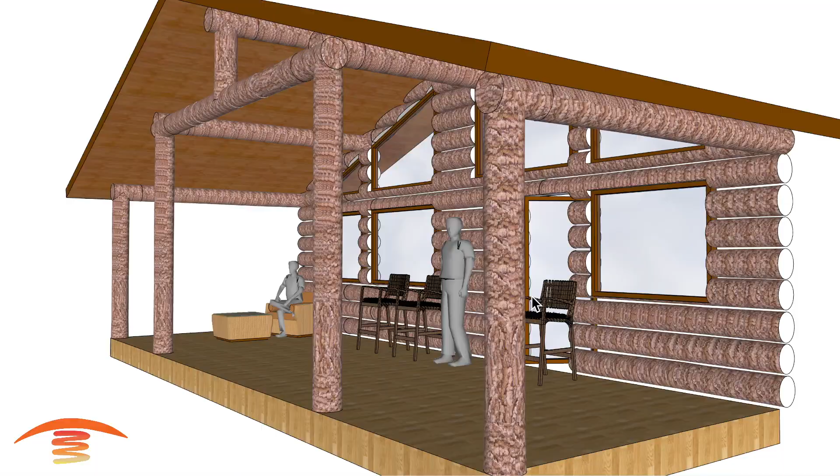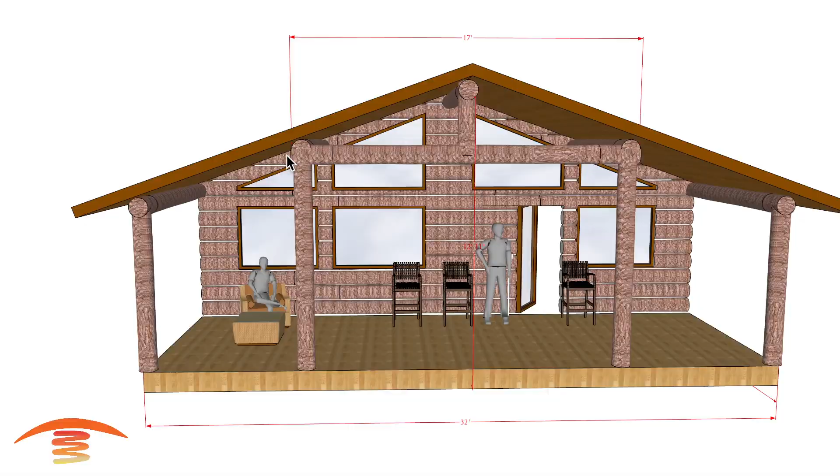All right, so here we have this log cabin deck, and let's go ahead and look at the overall dimensions that I have. The dimensions I have are 32 feet by about 11 and a half feet. We have different heights, but the main height here is 12 feet 11 inches to the bottom edge of this beam coming across. Also, I have the outer edges of this section at 17 feet, and we don't have the true slope, but it's not going to be that important based on what we're really looking to do on this particular project.

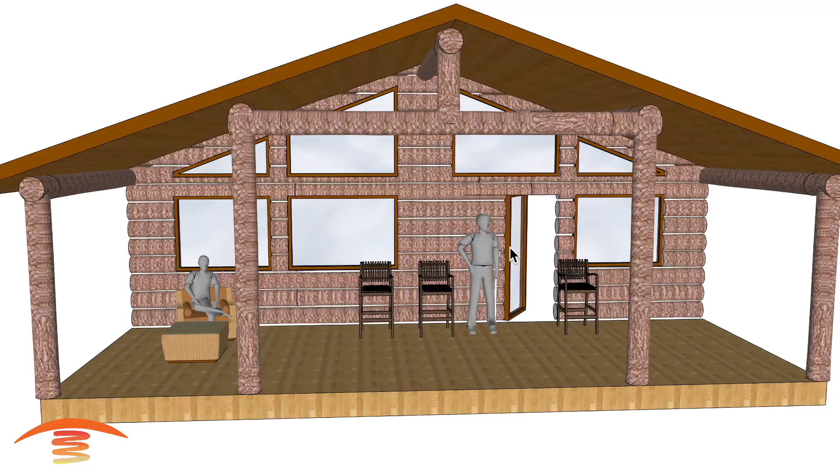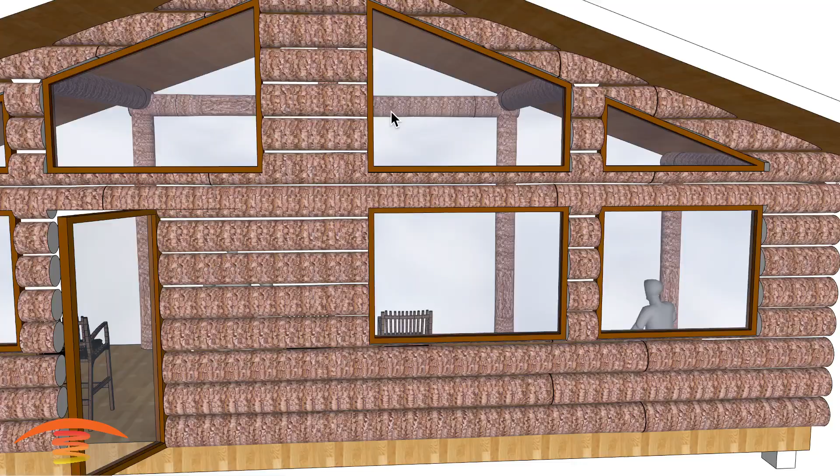So let's go ahead and turn that off and look at what options we have. I actually spoke with this client, and the main area that they really want to heat up is this area right here, as well as possibly this area over here on the left. Another thing they're looking at is not seeing the heater itself as much as the view, because this is just a beautiful view that they have here on this property.

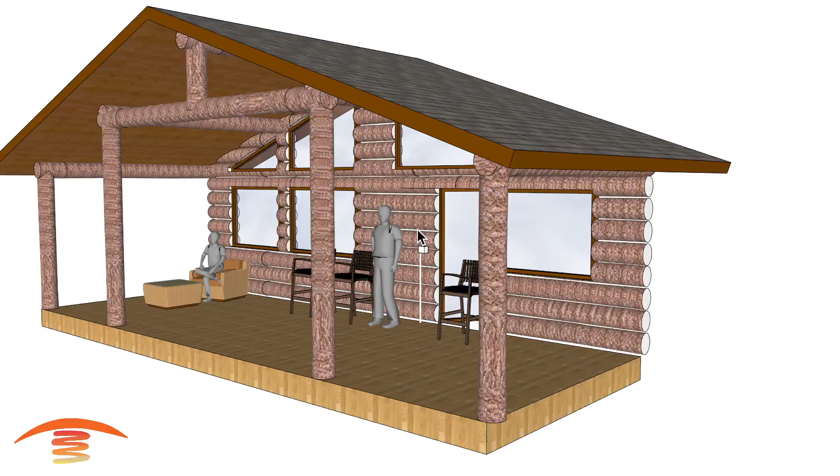So that's another thing we're going to take a look at, as well as the fact that this goes into a very, very cold climate. There was an inquiry about that cold issue, and we'll talk about that here in just a minute. First of all, let's look at what possibilities we have.

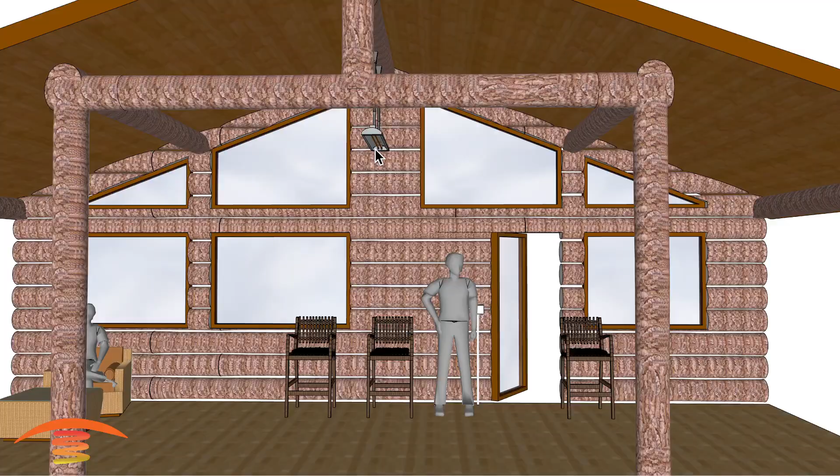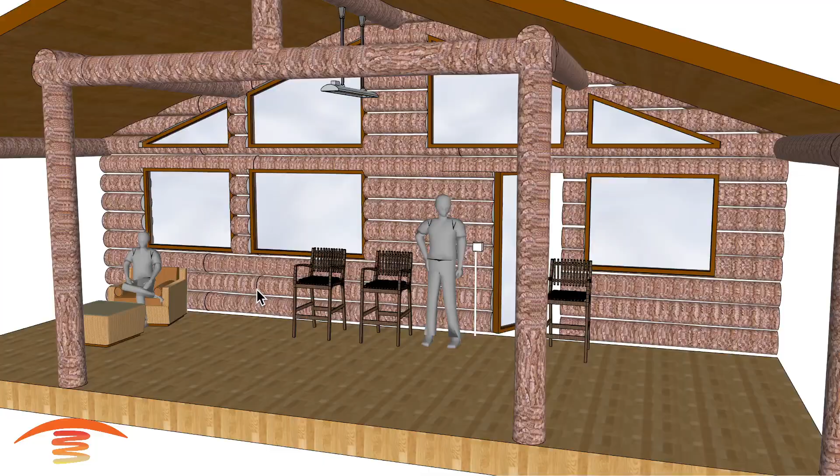So I'm going to look at placing one 5200 watt unit here. I have that centered within the patio structure itself, mounted on the bottom of this beam going across here. Also, I have it 12 inches off center to the right, from this point to this point. The reason for that is because this is the main seating area right here, and we want to make sure we're heating up that space properly.

Let's go ahead and look at the clearances below the heater. So below the heater, we need to make sure that we have 18 inches of clearance from this point to any combustible surfaces, and that should be fine with what I have here.

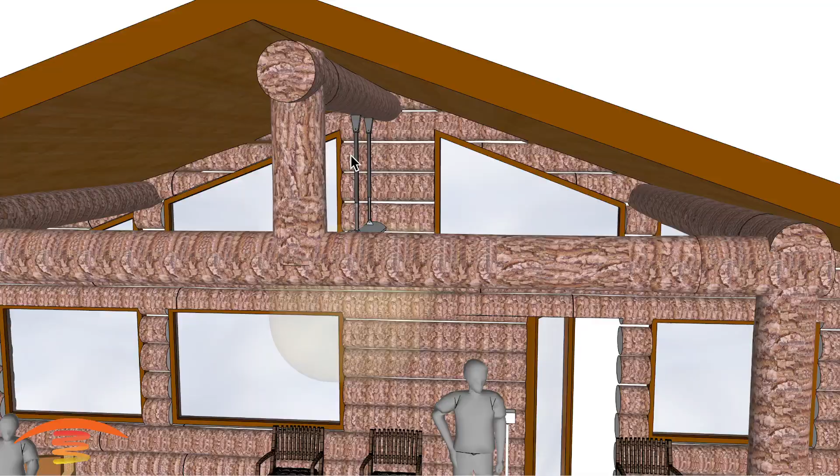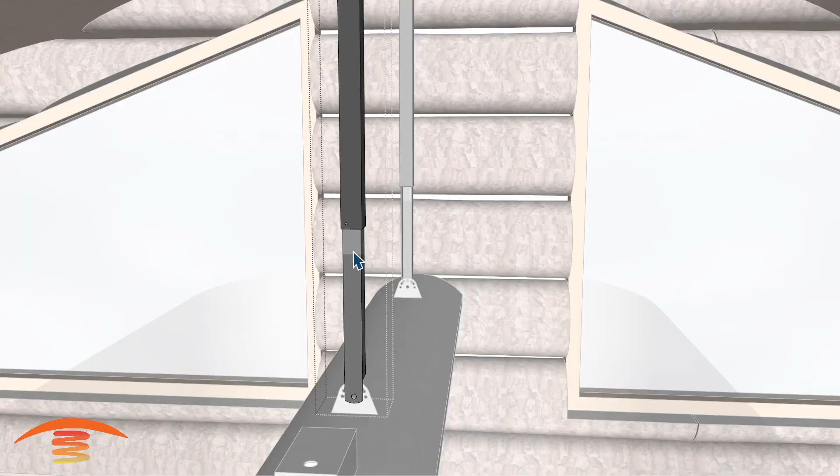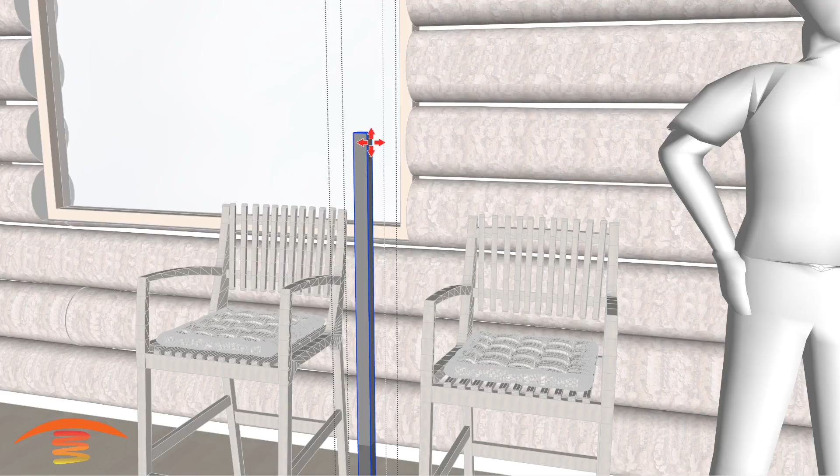Another thing too is we did use the drop down mount, and we had to customize that drop down mount, cutting some of the top portion of this. If you look at how this drop mount actually works, this piece here will slide up and down, and if I was to move it all the way down here, you can see how that bracket actually looks. I had to cut off a large portion of this top piece here. So let's go ahead and put that back where it was.

In any case, that would be something you need to consider, utilizing this. This isn't a high wind area, and I would definitely use something that's very sturdy for structural strength for the heater when it's in a high wind area.

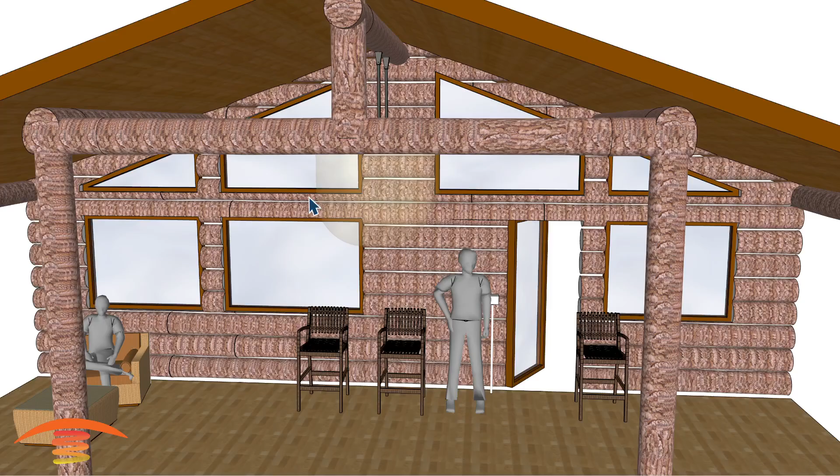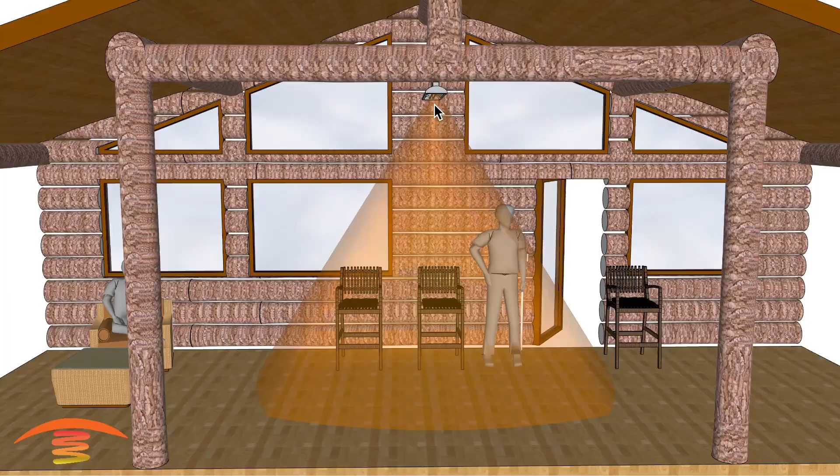So let's go ahead and turn off that clearance below, and now we'll go ahead and look at the footprint of heat. The footprint of heat, you can see here, we have it at I believe 10 feet off the finished floor. Let's go ahead and check that real quick, and we'll go right up to here. So yeah, about 10 feet off the finished floor. I have it actually 10 foot half inch, and I'll tell you why I have that in just a minute.

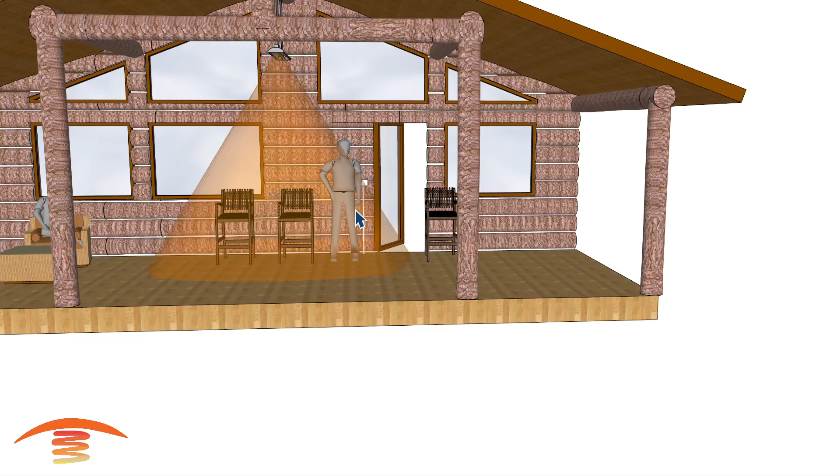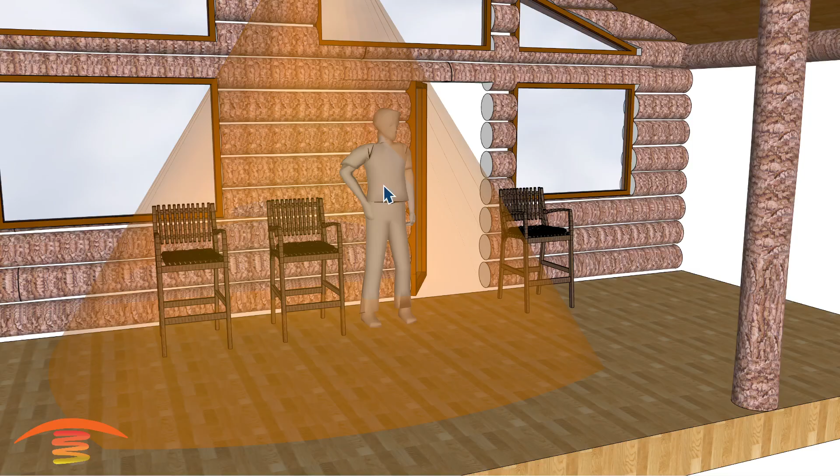Go ahead and turn that off, and that half inch isn't going to be critical, and I'll show you again why I have it like that. But in any case, you can see that the high seating area is something where you're going to be standing. It's like the standing model I have here. I have this model at 6 foot 2 inches high, and you can see that if you're sitting here in this position, you're going to be at a higher elevation as far as the intensity of the ray itself.

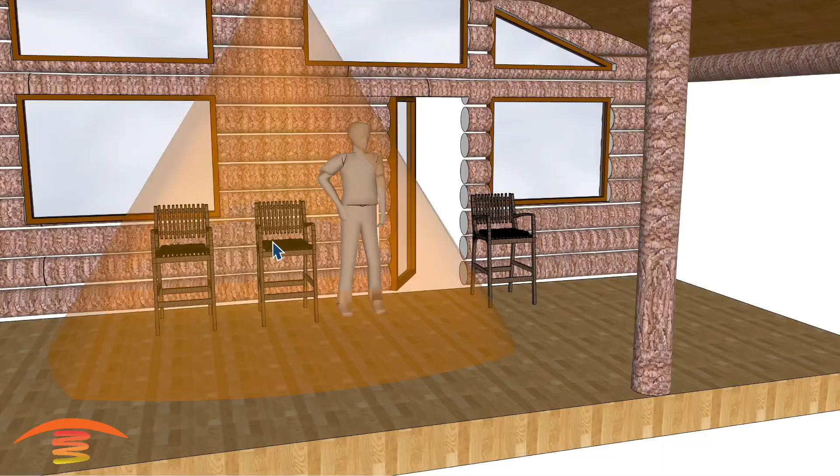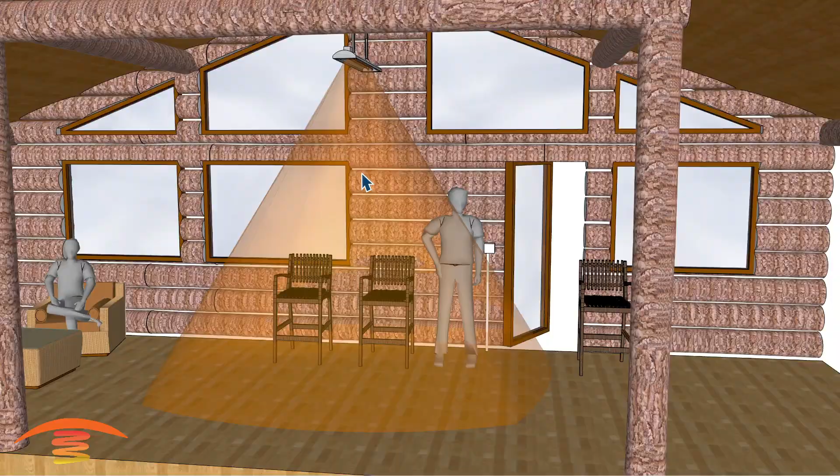So the intensity of the ray as it comes down is really designed for a lower seating position. So you probably want either a control panel where you can dim this down, or at least a duplex switch. Duplex switches would only make the unit go on 50% or 100%. I have that switch located right around here somewhere, coming up through the deck itself. In any case, just note that sitting higher makes the intensity a little bit stronger at times. But during those cold seasons, you probably want it 100% on. So it's something you really want to consider.

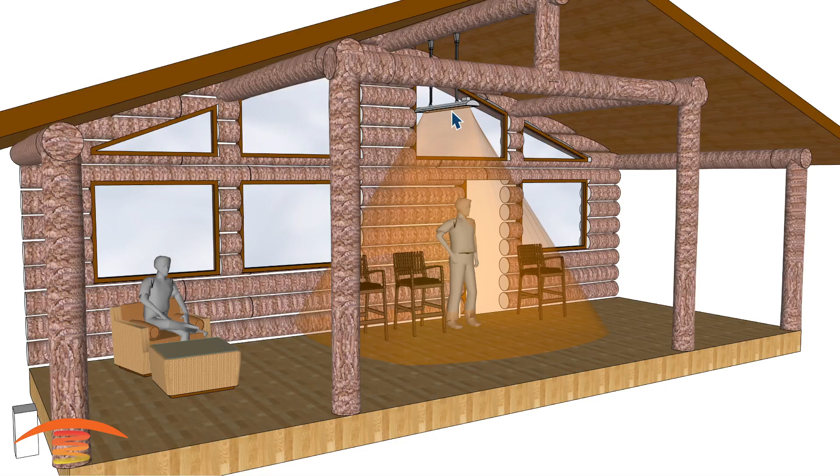Do you want to use a control panel, or do you want to use a duplex switch? I would say the duplex switch, majority of times at half power, probably isn't enough. So I would probably go with a control if that was my choice.

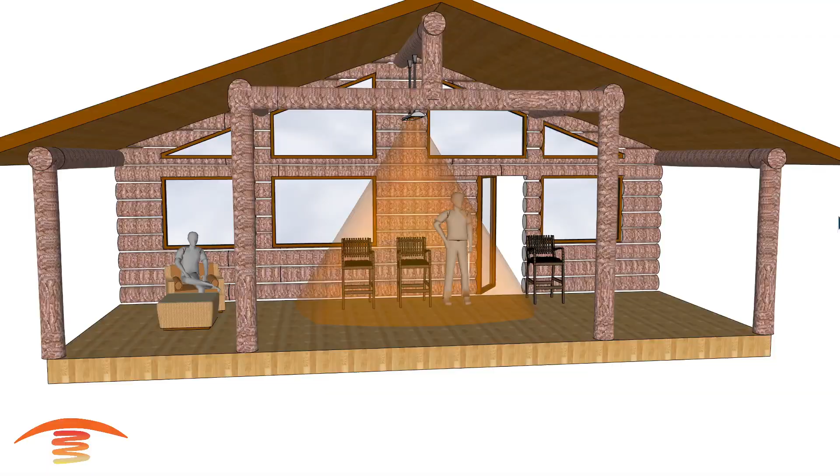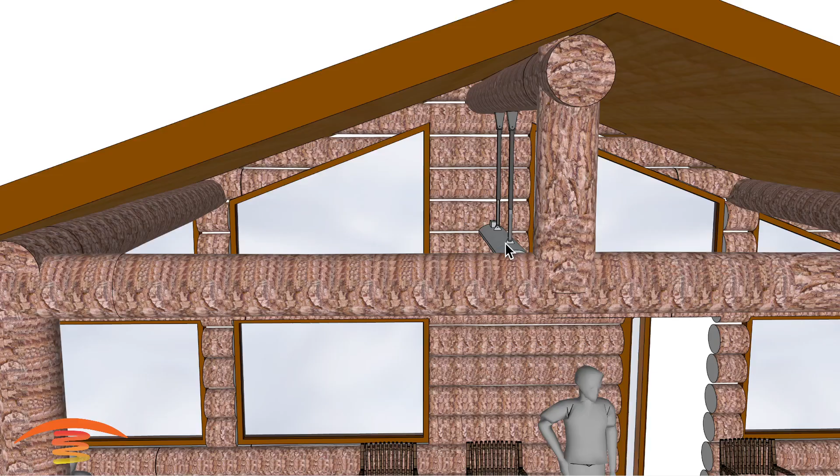All right, so let's go ahead and turn that ray off and look at a different option. The different option is, would they really use this space here for other options? So what I did is place the unit here in the center again, using the same kind of bracket.

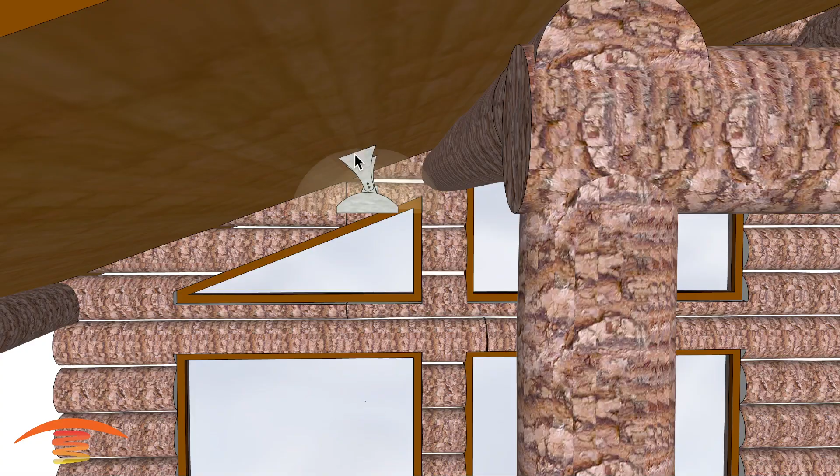And then I utilized this heater. This is a 5200 watt unit as well, making sure that I'm meeting the clearances above the unit using the OEM brackets mounted like this. That would be sufficient for meeting the clearance here. And just to note, I think I have it at 9.5 feet from center point of the heater here to the center point of the heater here.

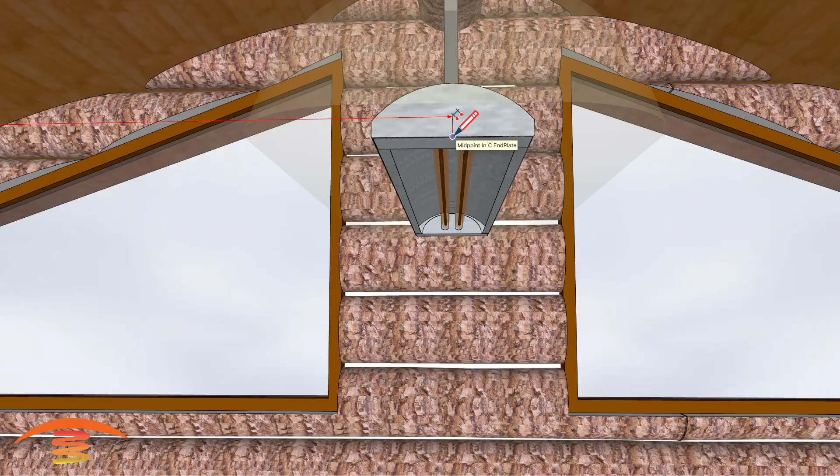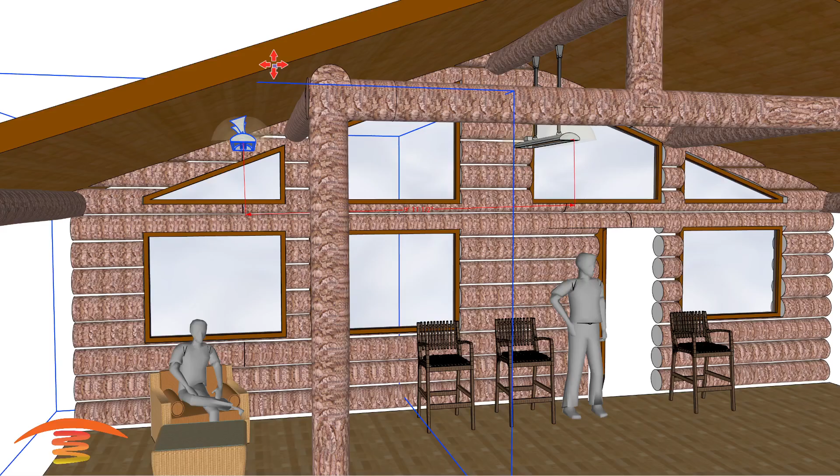Let's go ahead and see what that actually looks like. You can see that I actually have it at 9 feet 5 and a quarter inch. Now you can move this unit slightly based on what the true dimension of this beam here is truly like. So if you were to move it down a little bit further, let's just go with a couple more inches here, and you can see that we're still meeting the clearances. The distance here, 9 feet 7 inches now.

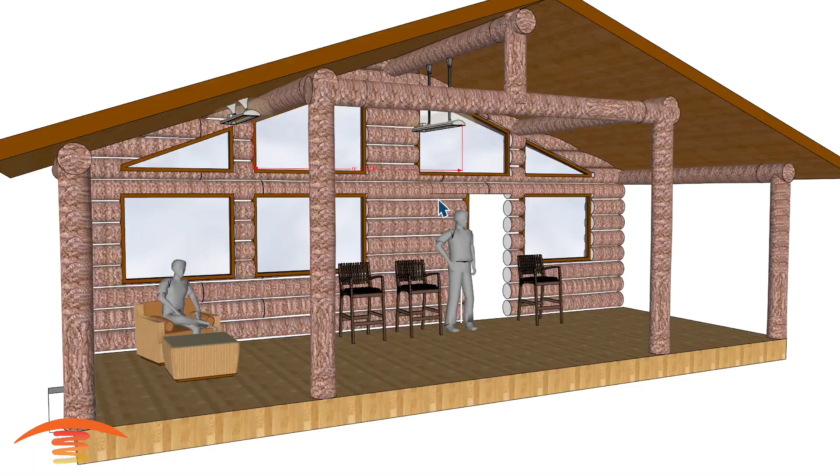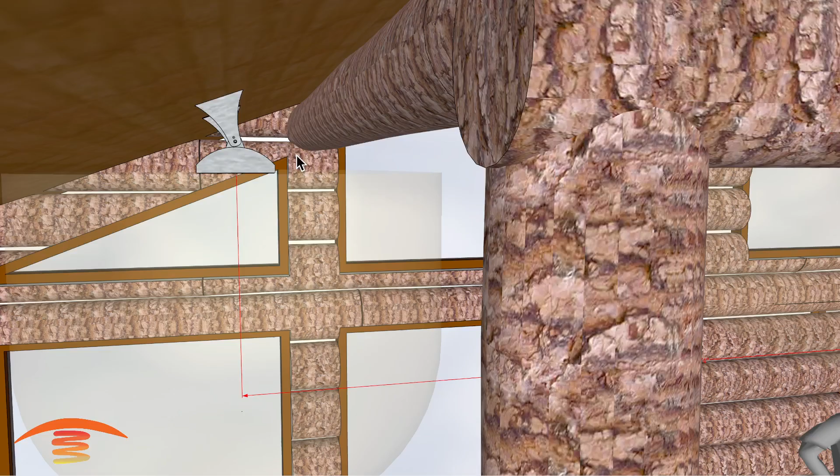It's not important for this view or demonstration, and you'll see that in just a minute. But we also again want to make sure that we're meeting the clearances below the heater. We want to make sure that the heater itself is below this beam here. So you can see this is the clearance below the heater, 18 inches on all four sides, 36 inches down below the heater itself. So something just to keep in mind when you're making the decision on placing what units you want in your application.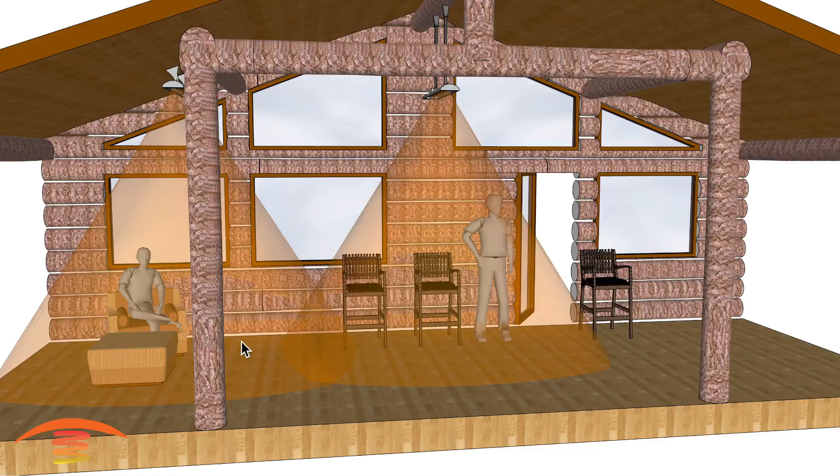This is pointed straight down to the ground, and so is this. Let's go ahead and look at the footprint of heat. You can see, and this is why I was speaking, that you can actually move this a few inches left and right, or rather left here. You don't want to get too close to this beam here. You want to make sure you have that clearance still.

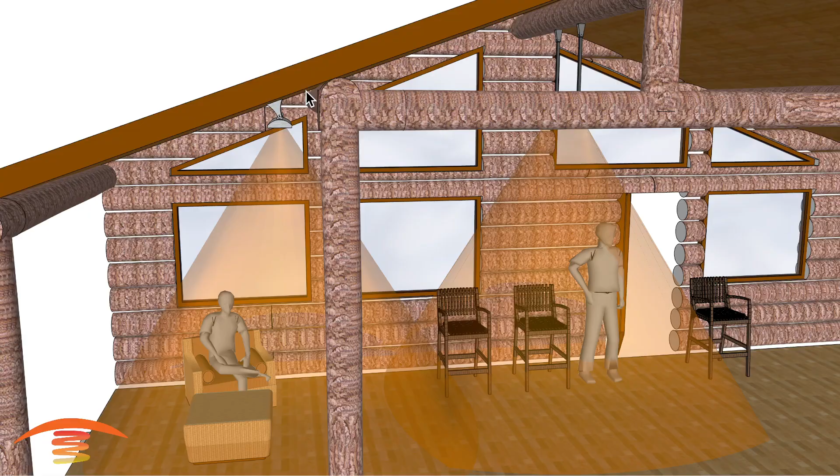But you have plenty of overlapping rays over here, and the heaters aren't at the same elevation as far as the height's concerned based on this slope. That's why I have that half inch difference. But in any case, you can see that we are now covering the whole left side and center position of this application. We're not concentrating on the outer edge over here as much.

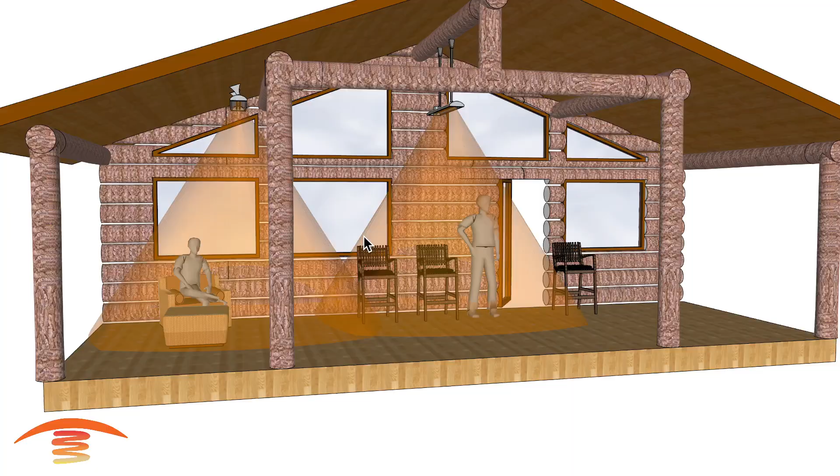Like I said before, that's why we're 12 inches off center from the heater center point to the center point of the structure. We're off to the right slightly, so that we're making sure that we're hitting the inside edge over here appropriately. So this would be a very good application, and I hope this decision is going to be made that they want either the 1 or 2 units. I have no issue with that.

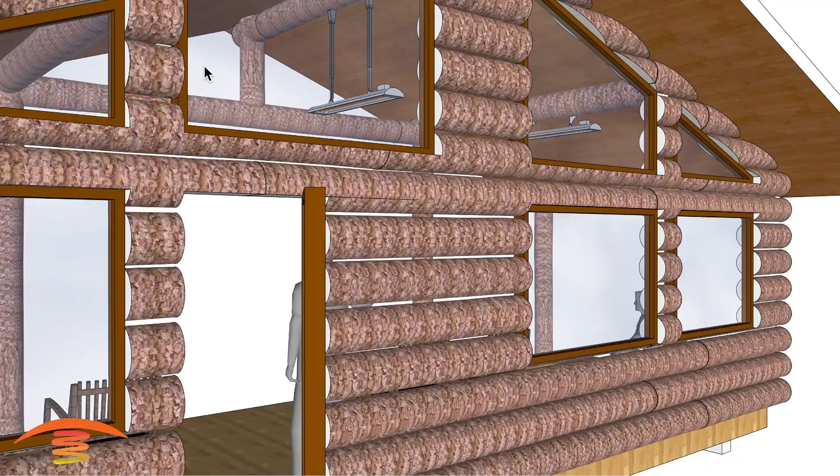But to get better coverage, it would be something like this. And I should also just point out how this visually would look from the inside. Again, talking about the viewpoint of this application. So you're not really seeing this heater unless you're really looking up and towards the top here. This one over here, again, you would see it from here.

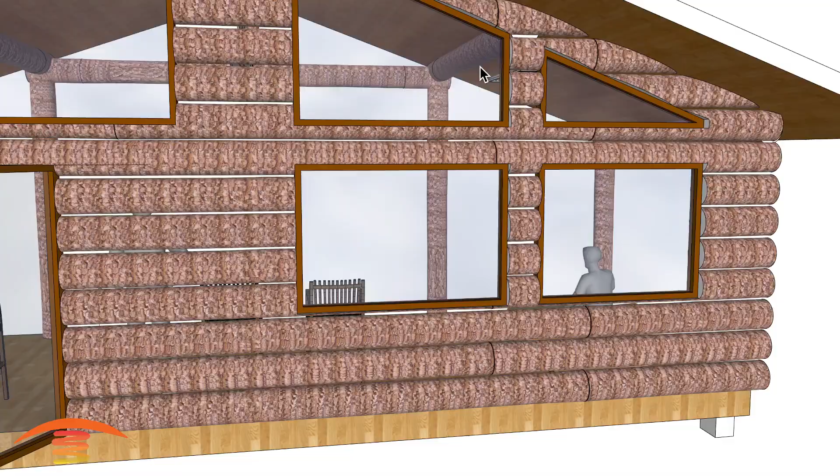But personally, I would say that most people would be looking out into the environment here, based on the beautiful view that they have, so they're not going to be concentrating on the top of the unit itself.

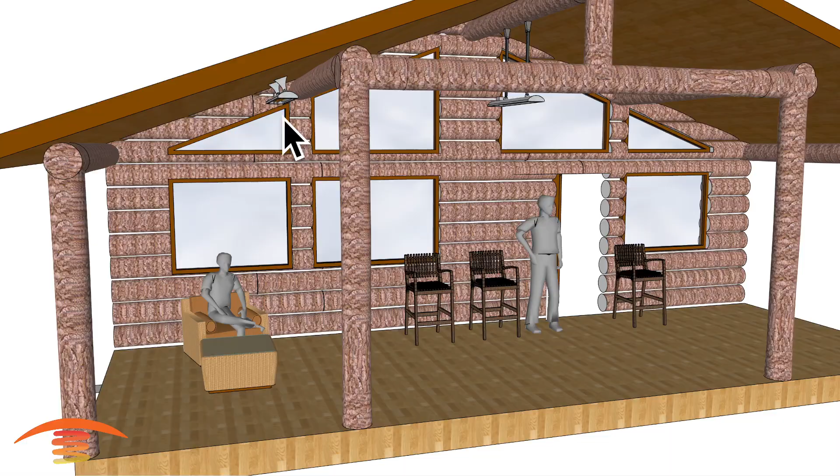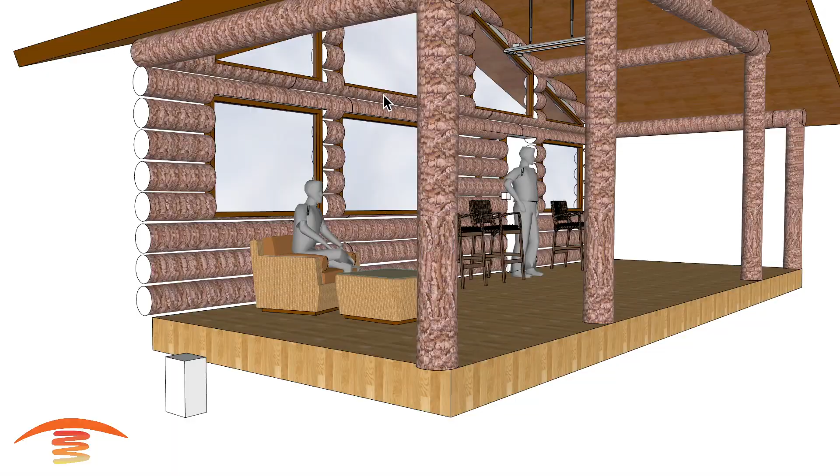And then I'll just state this lastly, is this: if this is going to be occupied in any way and you decide down the road to put this additional unit in, it would be more beneficial to do it at the very beginning, because you can bring all your power into the main control panel here, and then up to the unit itself, or at least bring in all the power here for 2 units and then make that decision down the road. But once you bring the power here, you'd have to run another power up in order to get a second unit to go. So just something to think about.

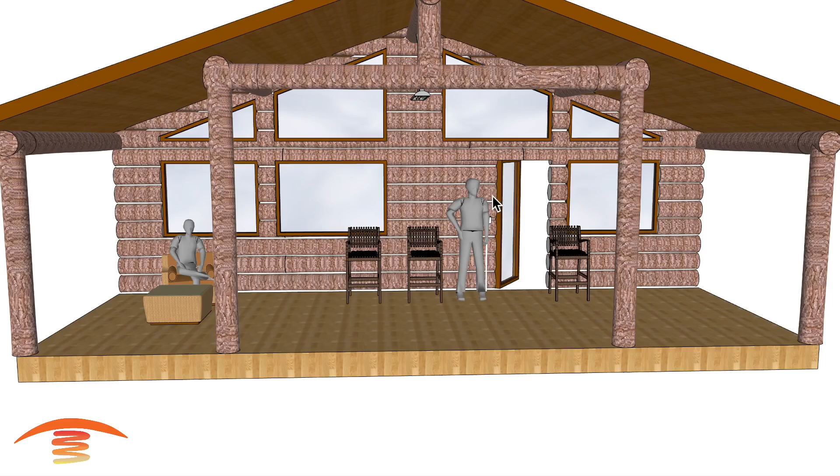But yeah, this would be a very good application. I like this very much. And this is also a very good application for just 1 unit as well, just to seat in this area here. The footprint is roughly about 10 by 10 in this configuration with this model here.